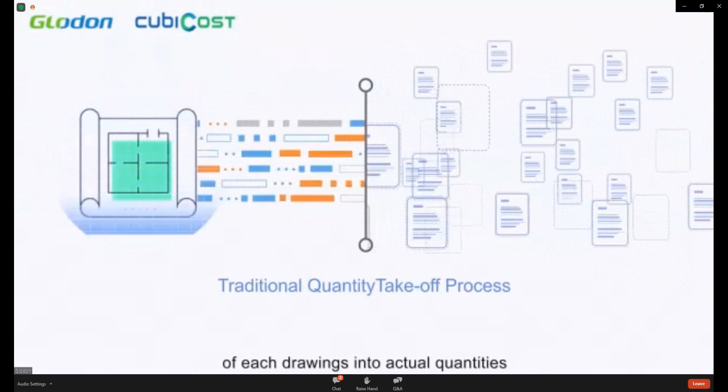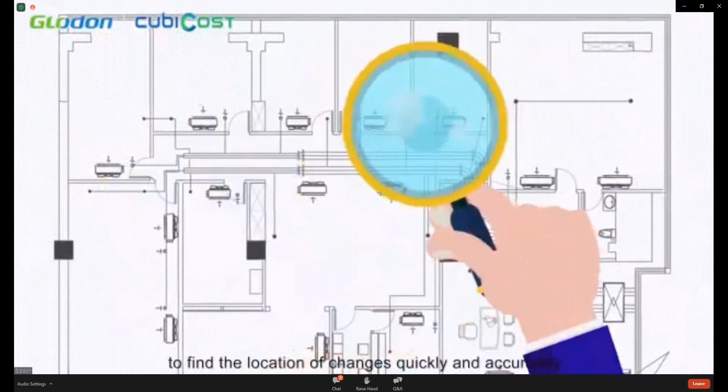The following shows the possible difficulties of the process. MEP consists of various device quantities, so it's easy to lose quantities. Piping is drawn in complex directions, requiring careful segmentation and itemization according to specifications. Drawings often change, and manual comparison cannot find the location of changes quickly and accurately. In cross-checking for errors, it's hard to find the relation between the quantity and the drawings.

Have you also encountered such problems? Let's see how Tmec can help transform your MEP quantity takeoff process.

Cubicost ME quantification tools have been developed for years. We really appreciate all the help and feedback from our fellow clients, because all of you are the reason the software is getting better now.

First of all, do you guys know what Tme is? Tme is an ME quantity takeoff software which helps all MEP professionals in the construction industry, including developers, consultants, and contractors, to calculate quantities rapidly and accurately, and check quantities easily and efficiently. Overall, Tme is able to help enhance your quantity takeoff process.

So now we introduce to you Tmec. Tmec is a new product in the Cubicost product line, a new platform especially for ME quantification, programmed with a new programming language as its base. Thus, it performs much faster compared to the older version of the ME quantification tool.

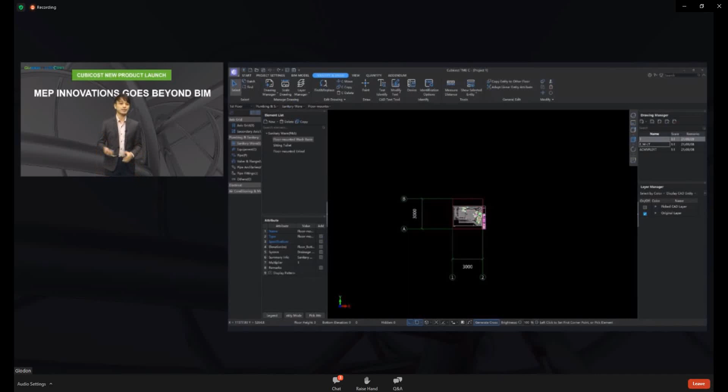Firstly, we have the function area. Then we have the drawing manager, where you import and scale your drawings, and the major elements navigation bar, where you can find all the major trades, for example ACMV, electrical, plumbing, sanitary. Then we have our element list - this is where the database is - and also the model area in the center, where you do your quantity takeoff. Lastly, we have the function toolbar, which is very easy to use and located at the bottom for easy access.

So all of this covers the content and corresponding functions for the entire M&E services quantification. Overall, Tmec is comprehensive and intelligent. The various function categories are clearly distinguished now in different ribbons, and it is easy to learn according to the layout of the calculation process.

To initiate a Tmec project, these are the usual steps we use to get the quantification. Start by managing the drawings, in which we import, scale, and locate the drawings. Then quantification follows. So it is actually pretty simple.

And one of the new enhancements in Tmec this time is regarding drawings. How do we deal with multiple drawings? Can we process them very quickly? For QS, handling multiple drawings is one of the important things to do. So how do we deal with drawings in Tmec now?

In fact, the overall process in the software is basically the same, but has been much improved from the previous version. For managing the drawing, you only need to go through a few basic steps: first, activate the function by importing the drawings. Then locate the drawing - for example, you can pinpoint or position the drawing accordingly. Then you can scale the drawing to the correct size.

Occasionally, if necessary, we can split the drawing if you have multiple levels or stories in the same drawing. Then lastly, you can go through the floor settings to edit the floor information. Why not let us look into detail for the drawing manager in the next slide.

Compared to the old version, Tmec has optimized the usability in the following aspects. The selected drawing can now be previewed directly, but if you're still not sure about the drawings, you can even double-click the picture here to preview the drawing in detail before you import.

In the scenario of multi-page drawings, you can control the range of the imported drawings now. For example, I want certain pages of the entire PDF, maybe page number 1, 3, 5, or 7. I can select what I want to import instead of importing the entire PDF.

So the whole set of drawings are not in the same scale, but maybe some of the scale could be different accordingly, which affects the quantification accuracy. So in this case, QS also requires the ability to process the drawing quickly.

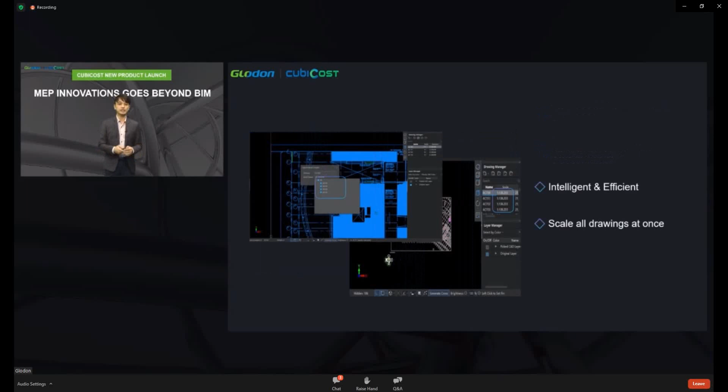In addition, Tmec can now scale all drawings at once, as I mentioned just now, after you import the drawings. This greatly improves the efficiency of the process in managing the drawings in Tmec.

Also, Tmec supports one drawing now across multiple floors for reuse purposes. This enables quick calculation on multiple stories when you have the same drawing for multiple floors.

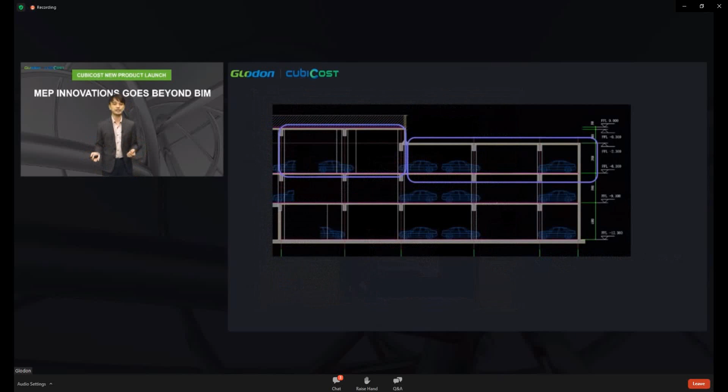To support this function furthermore, Tmec is now able to solve these kinds of conventional scenarios for buildings with different floor heights, especially like residential projects. We have various blocks, right, together, sometimes with a car park.

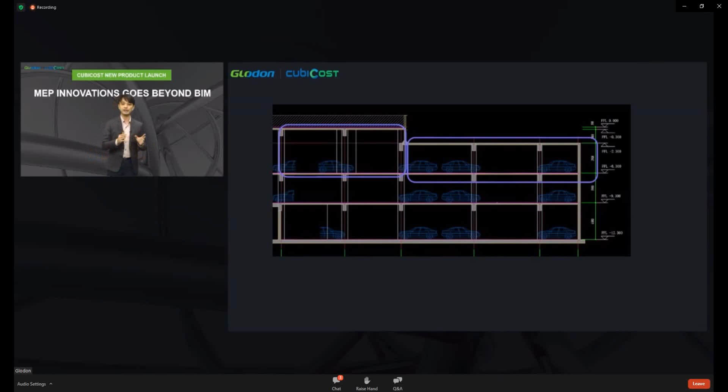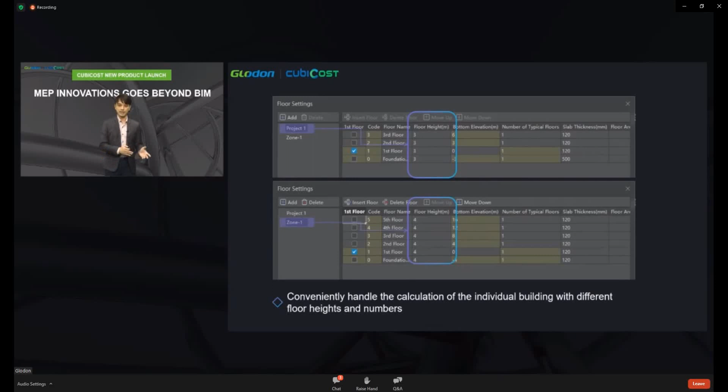In order to quantify this, they need to calculate the quantity separately by blocks. So in Tmec now, it can easily solve such problems by adding multiple zones to the floor settings. With this, floor heights of each block or zone can be set independently.

So right now, we have already seen some of the basic improvements for drawing processing in Tmec, right? But what about changes in drawings? Traditionally, we have to find out the changes on top of the drawings manually, which is highly time-consuming.

So let's take a look at how Tmec can quickly and accurately find out the location of changes this time, compared to the old version, in which it required QS to open a drawing externally to compare the changes, find the location in the drawing, then return to the TME for subsequent calculation or editing.

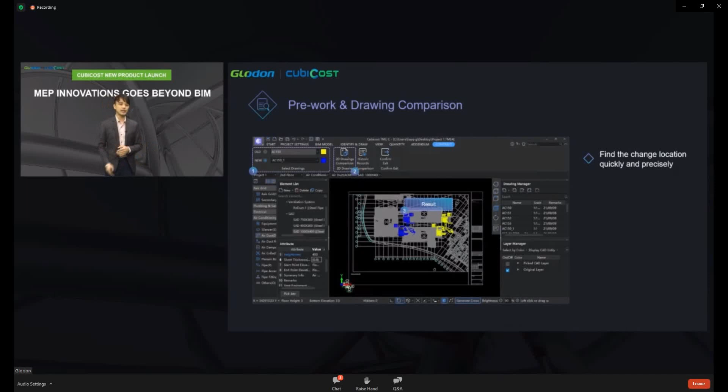In TMEC, it is now included with a new function for drawing comparison. QS can now nominate two drawings to compare. We can see that the location of the changes are marked in different colors. This allows the differences to be located quickly and accurately. When discrepancies are corrected, the comparison remains in the drawing area and the changes can be viewed in real time.

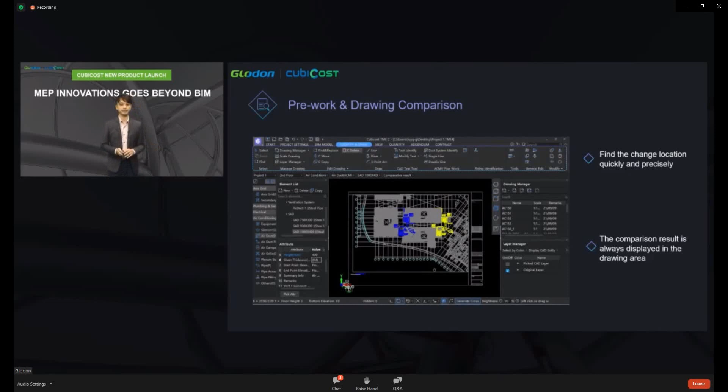So that's pretty much about the drawing enhancements. Next, let's take a look at the core content for M&E major trades. Firstly, let's get to know the improvement in electrical trades.

In the electrical sector, TMEC supports the calculation of the following elements. Firstly, we have the lightings and luminaires, but with the enhancement on lighting strips now, we can calculate in terms of meter length, switch socket outlets, distribution boxes, wire cabling, and also tray trunking, bus bar, and last but not least, we also have lightning protection systems. So in TMEC, each calculation has a function to help us calculate the quantities easily and efficiently. Let's look into more details here.

You may encounter the following problems when measuring the quantities of electrical work. There are many kinds of electrical quantities, often with different labels to differentiate them. In this kind of scenario, QS has to quantify them individually according to their label assignment. It is pretty easy to miscount the quantities when you do it traditionally, because we have to separate them with different highlights or colors, then further transfer them into Excel carefully to compile the data.

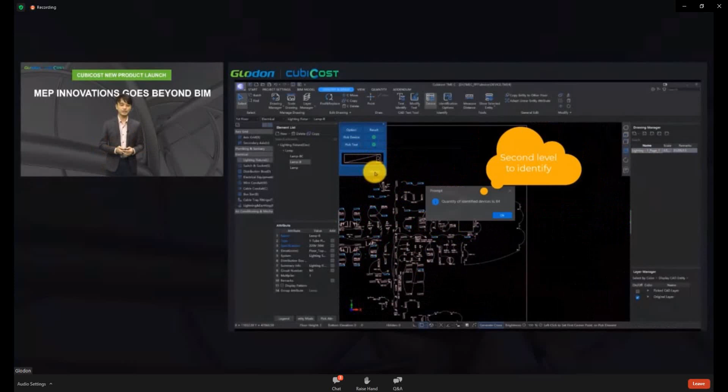In TMEC, there is no need to convert the text first anymore. It only takes 4 steps to identify the devices with labels in the drawings. Then the location of the identified devices can be previewed in advance to further ensure the accuracy of the identification.

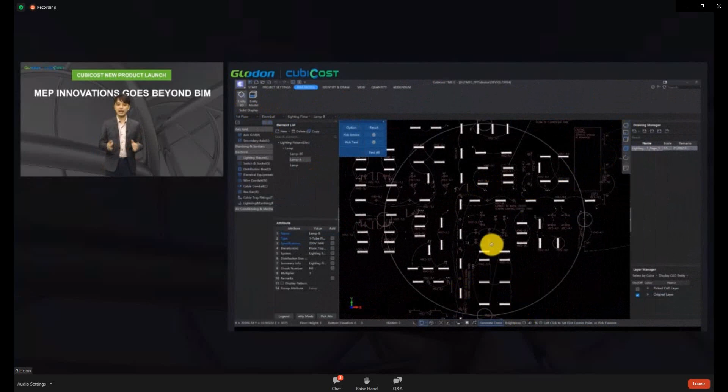This functionality is able to identify hundreds of elements in 3 seconds on average, which is 40% more efficient than the old version. Overall, it is more efficient, simpler, and more accurate.

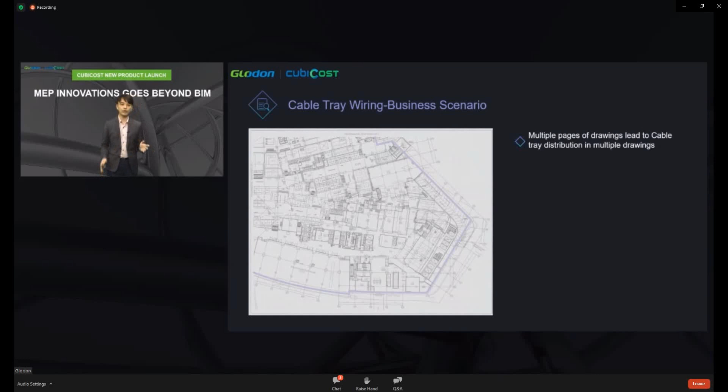You may also encounter the following problems during conventional takeoff in electrical work. The drawings have long circuits for power and lighting systems, especially across floors or even in the same floor, and now they are generally distributed in multiple drawings if the project is big. So it is necessary to find and measure the corresponding length quantities one by one. This process is again highly time-consuming and it has low traceability. Furthermore, the work is not easy to verify.

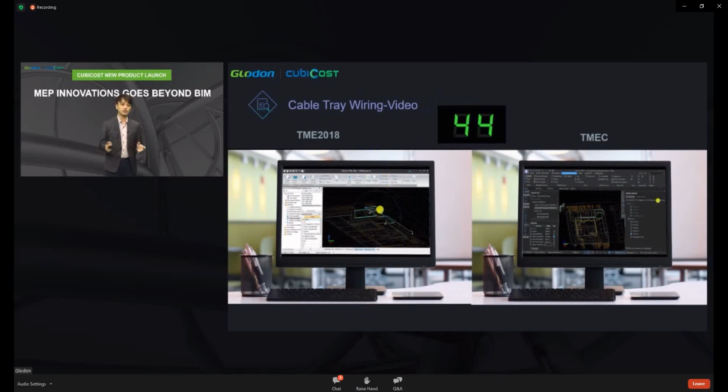In the old version, if you look at the left side, the wiring function had to be operated through many windows. Users found the process very complicated, and it was not easy to learn for newcomers. But do not worry anymore.

Right now, TMEC simplifies the whole process on the basis of ensuring accurate wiring, making it easier to get started for every user. Especially for sub-main cabling works, users only need to select the start point and the end point of the circuit to quickly complete the entire wiring. It can be done in 3D view or in the same interface, which means no more multiple confusing windows to operate.

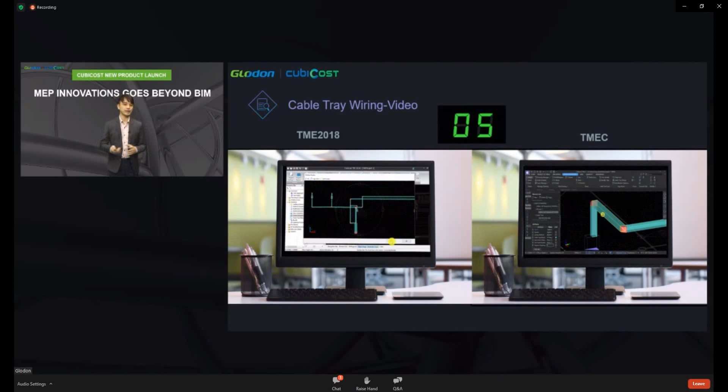After the cabling measurement is completed, you can counter-check the routing by distribution box to clearly locate the quantities and verify how certain wiring is being done in the routing.

So after understanding the electrical trades, let's switch gears and look into ACMV now.

In ACMV, we support the calculation for the following contents. First of all, we have ventilation fans, air ducts, and fittings, coming along together with the silencer, air dampers, grills, diffusers, and even the plenum box.

In TMEC, each calculation content has corresponding functions to help calculate the quantities conveniently and efficiently.

The customary process allows QS to classify and count the quantities according to the connected fan equipment. If we use the software to identify the fan, the software can help us synchronize the fan information connected to the air duct, air dampers, or other equipment with one click, reducing time consumption and greatly improving work efficiency.

Just now, we understood the convenience of identified fans for subsequent processes. So let's have a look at how ventilation fans are calculated in TMEC.

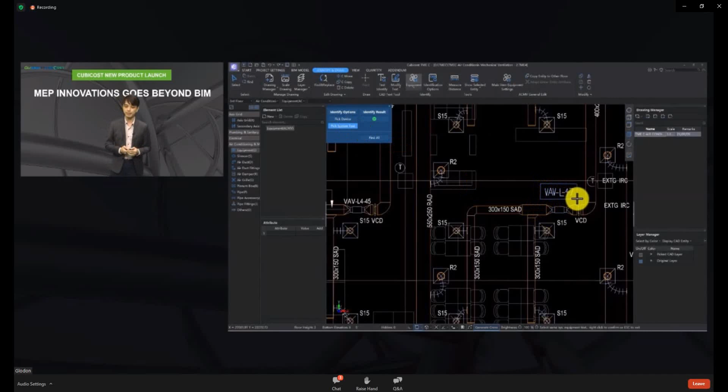Now, in TMEC, you only need 4 steps to identify them. In this example, all of the ventilation fans with their unique individual labeling are identified altogether at one time, and presented automatically according to the fan names after identification is completed.

Traditionally, when you quantify air ducts, you may encounter problems. There are multiple air duct systems in the drawings, and the specification, materials, and thickness of the air ducts of each system are also different. In the conventional method, we classify and count the quantities according to the system and equipment. This process is cumbersome and time-consuming.

Also, there is insulation to be calculated. Insulation includes internal and external insulation. The insulation materials, thickness, and calculation methods are again very different from each other, which makes it not very direct for us to calculate the insulation quantities manually.

Thirdly, there are many types of air duct fittings, such as T-type, reducer, elbow, and etc. Some connector types need to be calculated, some do not, which further makes the calculation more troublesome. In addition, due to the irregular shapes of reducers and elbows, it is also difficult to calculate the quantities of the respective expanded area.

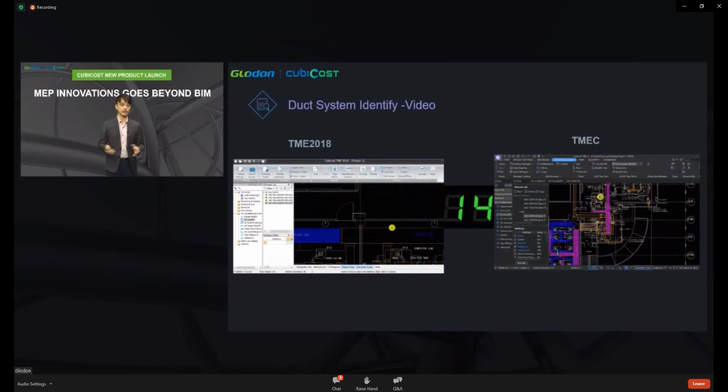Compared to the old version on the left, TMEC improves the calculation efficiency by about 45% when identifying a whole drawing for ACMV trades.

In the old software, it was difficult to distinguish insulated air ducts from common air ducts. TMEC has made a special display for internal and external insulation, as well as fire-rated air ducts, as you can see here, which can clearly distinguish the insulation types of the air ducts and revise the original calculation rules for insulation, so that the calculation quantity is now more accurate than before.

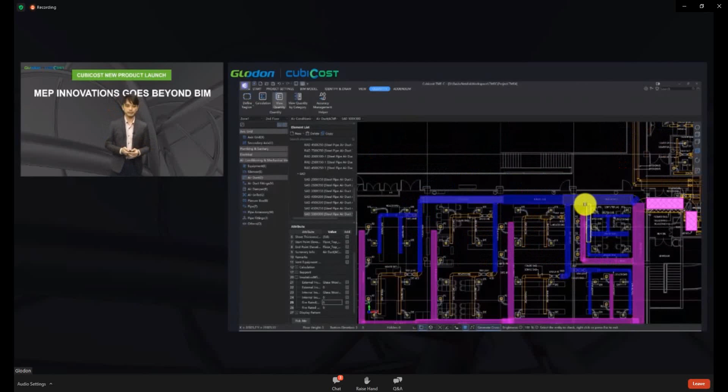For air duct fittings, there is a specific function for this. Air duct fittings can be generated all in one go, just by using the air duct fittings identification function, as you can see here. Multiple air duct fittings are generated at the same time.

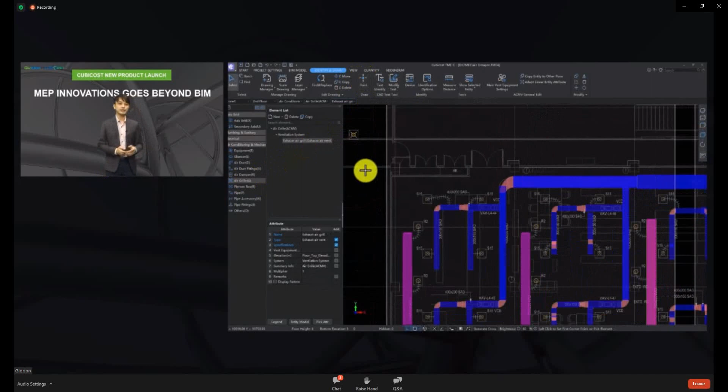What about some air duct ancillaries or air duct parts? Compared to the old version, TMEC can draw air grills and diffusers independently now.

Also for air dampers, it matches the air duct specification when the air damper is identified, as you can see here. So the air dampers inherited the duct information, for example, sizes and also the system.

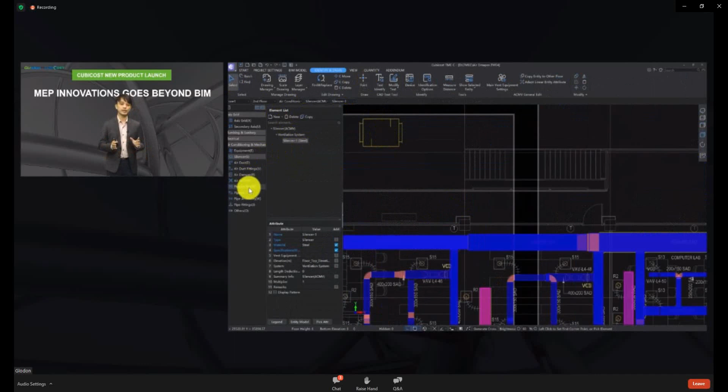In addition, TMEC also supports the quantification of doing silencers and plenum box also.

After quantifying the air ducts, equipment and the rest, let's take a look in the video to see how quantity can be extracted in TMEC.

In TMEC, users can trigger the functions main vent equipment settings under ACMV trade. TMEC will synchronize the fan information to its connected air duct, air dampers, plenum box, and etc.

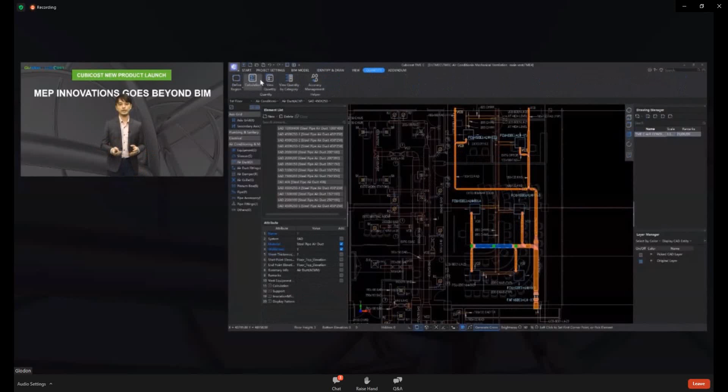If the equipment has multiple ventilation fans, the software will give a prompt and user can select output according to their preference. After the quantities are calculated, we can view the quantities of the air ducts that is connected to each different equipment.

If the user tries to double click the quantities here, they are able to perform a check of the corresponding quantity like this.

Aside from ductings in ACMV, it is also often that QS needs to quantify AC pipings.

In TMEC, it is now supporting the following content, including AC pipes, refrigerant pipes, together with the valves and fittings.

In particular, compared with the old version, TMEC is now able to quantify refrigerant pipes in a more efficient and accurate way, which last time we don't have.

So that's all for ACMV. Now is the third trade in TMEC, plumbing sanitary.

In PNS, TMEC supports the quantification of sanitary wares, water pumps, tanks, piping, together also with the valves and fittings. Let's have a closer look.

Have you ever encountered the following problems? In calculating the quantities of the water pipes in plumbing sanitary, when the elevation of the two connected water pipes is different, the quantities of short riser connecting each other need to be calculated manually.

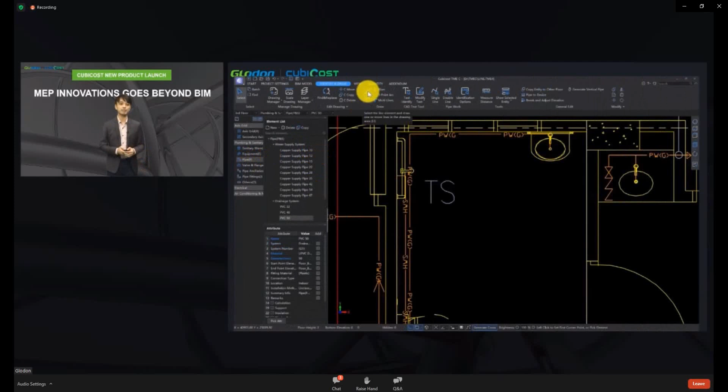elements, common water pipes, material, and pipe diameters are built in beforehand in TME. After water pipe elements have been selected, you can set the elevation and draw a straight line straightforward.

In the process of drawing the water pipes, the elevation can be adjusted flexibly and quickly.

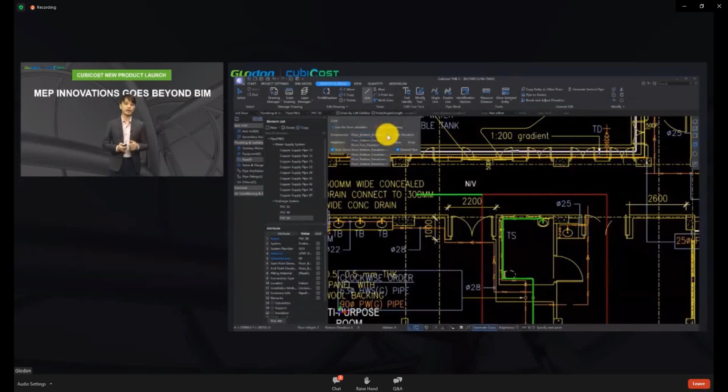It can be seen that once all the piping has been done in the 3D mode, you can view that the short riser in the connection will be generated automatically like this, according to the change of water pipe elevation.

The user can also now use the view quantity function to check the quantity for each section of the water pipe in real time.

So in another scenario, for example, the cross-floor piping like this, when you calculate the vertical quantities under the plumbing sanitary trade, you may encounter the following problems.

It is very easy to make mistakes when converting the elevation of cross-floor risers.

TME only needs one function now, which we call the riser function, to perfectly resolve all problems.

So for example, QS just needs to select the water pipe element first, then set the starting and ending floors of the pipes to draw.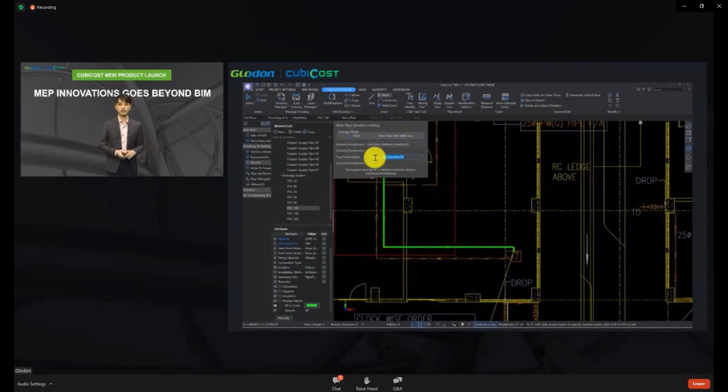Compared to the older version, TME can also handle the vertical riser with reducing diameters. The spatial direction of each section of the water pipe can be clearly viewed under 3D so that the quantities are very easy to verify by the QS.

Okay, so next, let's look at the relevant quantification output in TME.

In quantification, according to the requirement in BQ, the actual output dimension varies, such as by building, by floor, or sometimes by room, or even sometimes a combination by building first and then by floor.

There are many ways quantity can be tabulated and categorized by the QS.

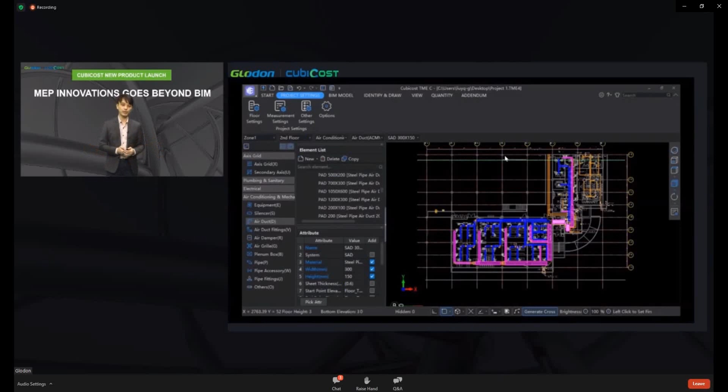So let's watch a video on how to output quantities in TME accurately and flexibly.

First thing, we can support multiple zones quantity outputs.

For example, after summarizing, the quantity can be classified according to the building zones now. Click the specific cell to tabulate the quantity of the specific zones.

And also, you can output the quantities by floors like this. You can set the floor as the first level of classification in the classification query.

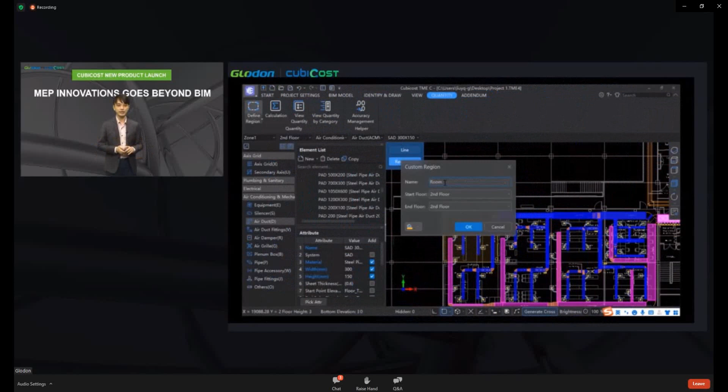If the quantities need to be measured according to the area, first the user can define the area needed using a straight line or even a rectangle. So we have about 2 methods to draw now, which is very fast and efficient. In the process of drawing rectangular area, if the area is large, multiple areas can be drawn continuously and the software will merge the areas automatically like this.

And if the area boundary changes, you can re-edit the area boundary, which supports free drag and stretch. So once you have finished completing the region, set the region as a first level after the summarize classification condition. Finally, the quantification will be classified as per region.

Lastly, QS can also click any cell to find the quantity in a specific location in the drawing area.

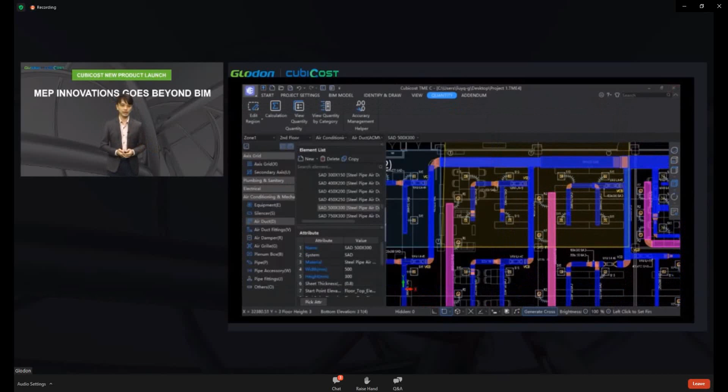With this, finally, let's look into the TME future plans. Firstly, we are going to have a professional expansion in the future by adding 2 other major trades in TME. First of all, we have fire protection to look forward to, together with the ELV system, extra low voltage.

Also, we are planning to include a new function in the incoming software updates for scan drawing identification. So hopefully all the QS can bid farewell to manual quantification for scanning drawings, especially for the major trades.

So with this, I hope all of you have a better insight now for the Cubicost TME solution, and how the solution is able to address MEP QTO needs, advance the QTO processes, and how it can benefit MEP organizations in the long run. So just to remind everyone, if you have any questions in mind, please feel free to drop your questions in the Q&A chat box.

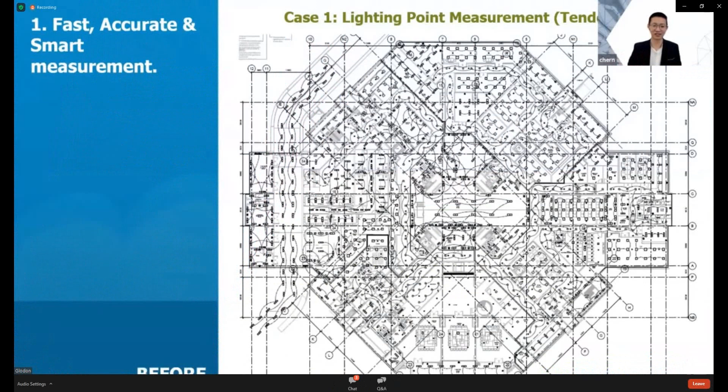So this slide is my secret recipe on how I recorded down my quantity before our company adopted this digital solution. The first thing you can do is crop this legend table from the legend list drawing, paste it into Microsoft Word or other Microsoft software, then print it out and draw a box on it to show the different floor levels. So like you can see here, what I do is go from basement all the way to level 9 with some mezzanine floors, and you just record the quantity here.

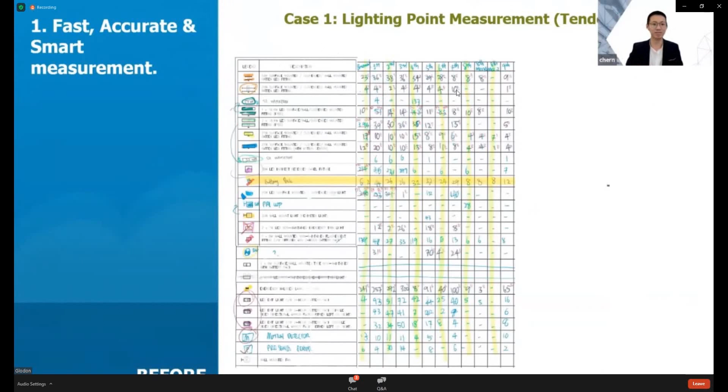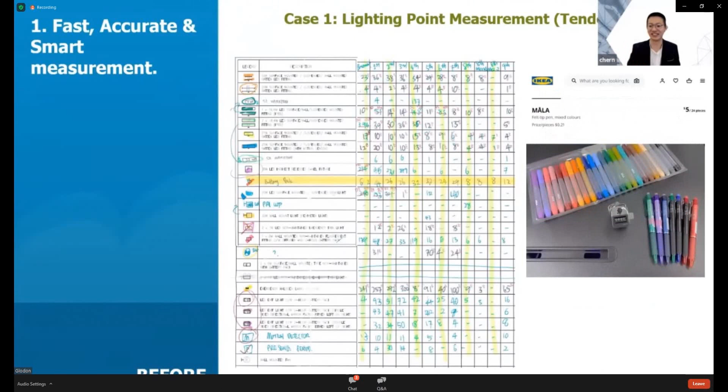Next, this - a very important item - called MÅLA 24 colors marker pens from IKEA, which just costs about $5, and the erasable pen from Don Key. In the next slide, I will show you why you need to do so.

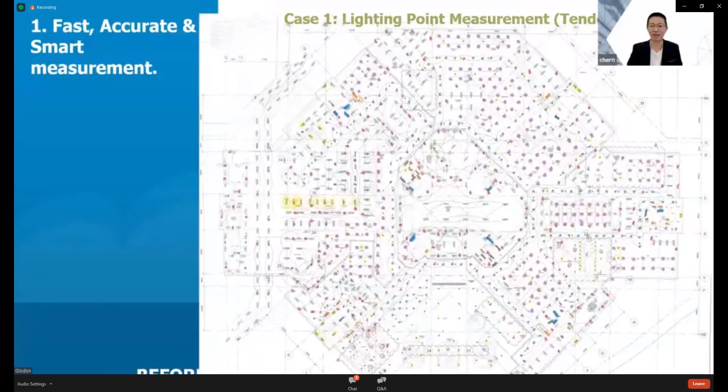Because every time you tap the counter for measurement, simultaneously you have to mark with the color pen on the drawings and record down on the papers. Sometimes you may realize that some legends are missed out, and then the best thing to do is use this erasable pen. So after you record and realize the mistake, you can just erase it and rewrite the quantity on the hard copy table.

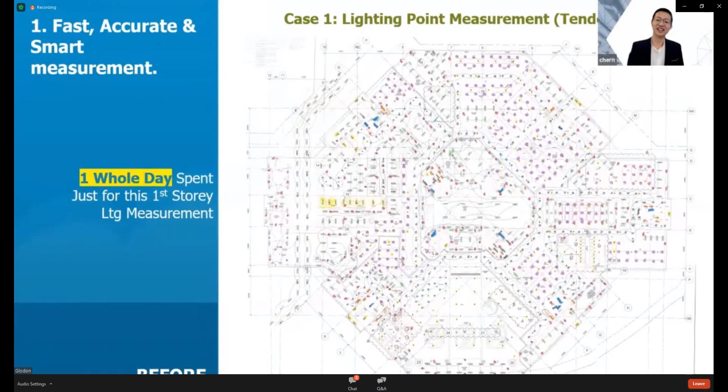Kidding or not, for only this one storey it actually took me about a whole day to complete. Because our daily work involves interruptions, we need to answer some interrupted calls, reply to urgent emails, or join discussion meetings, and if any of that happens, the whole day is gone and only this one piece of drawing is done for the measurement.

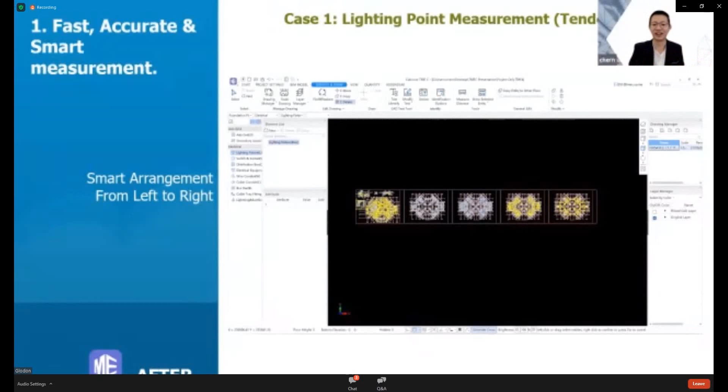If you also feel me on this problem, here's a solution from my company, and we actually give this software a try. It's super smart. You can insert as many drawings as you want into the same template, just like this, and it will be arranged from left to right, as you can see in this picture.

This software also has a very smart layout identification function. It's automatically identified, and it's best for visualization for quantity takeoff purposes. It's able to differentiate the grid lines, as you can see here shown in pink color lines, the architecture lines in gray, and some M&E lines in yellow colors.

We're able to hide or show the lines that we want to see or visualize, like this. So what I do is I just hide away those archi lines and the grid lines, and show only the legend lines, so it's in the yellow color.

Next, here's a quick video showing you how I let the software run for the identification work. Let me play the video.

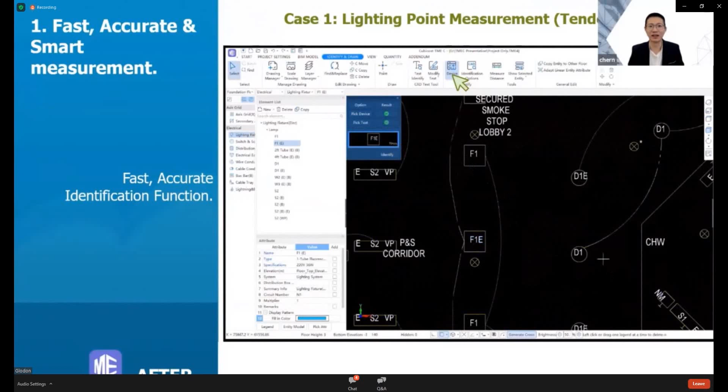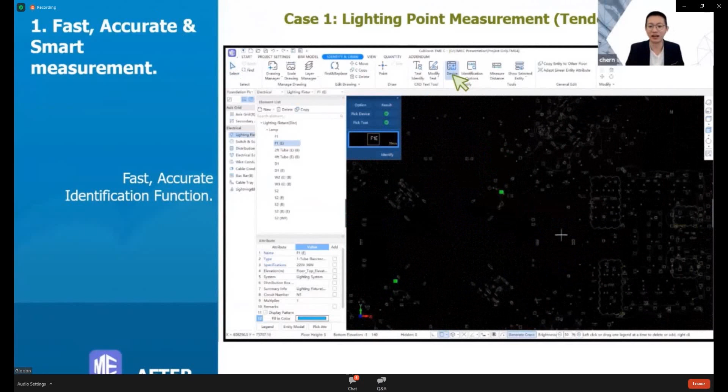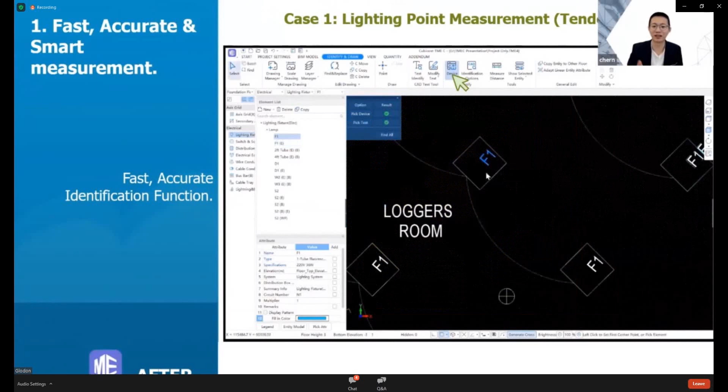The first thing is you need to zoom into the drawings and follow the instructions. First, select the legend item, pick the device - like I would do, the F1E lighting - then click the find button. If you can see here, it's showing 17 numbers of this kind of lighting, an E-source downlight F1. You can also identify other types of legend lights, like I do now - it's also a downlight, but it's a normal source F1 downlight. You just pick the device, pick the text, and click find. It's showing 442 numbers of this kind of lighting among all the levels.

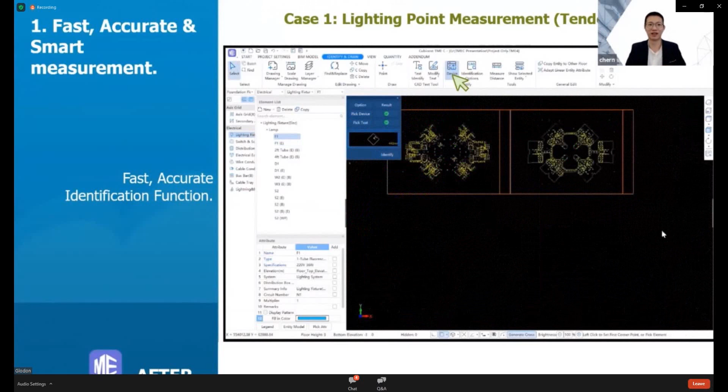Just one click and you can measure for all stories. You can also set it to the color which you prefer - like I do, I pick a blue color for this F1 downlight.

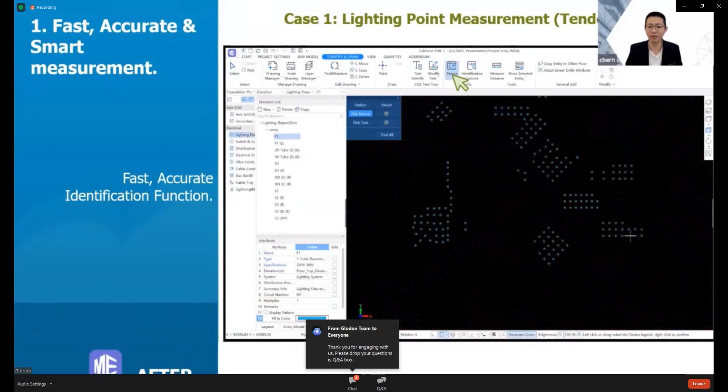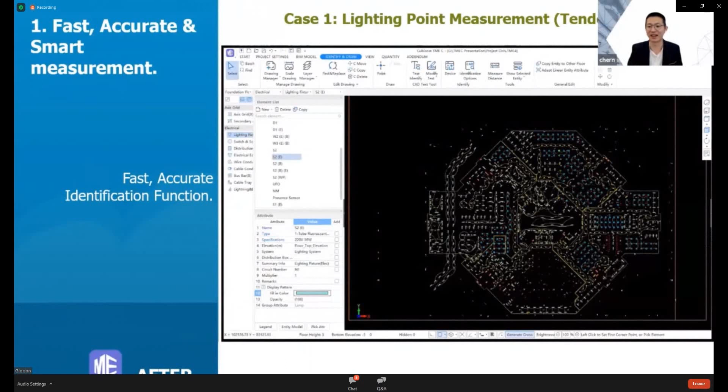This is after I finish my legend identification work. As you can see here, all the identified legends are very easy to visualize, and you can hide or show the archi lines back anytime you like. Now it's showing all the identified legends, and you just press one key to bring back all the archi lines if you want, just like this.

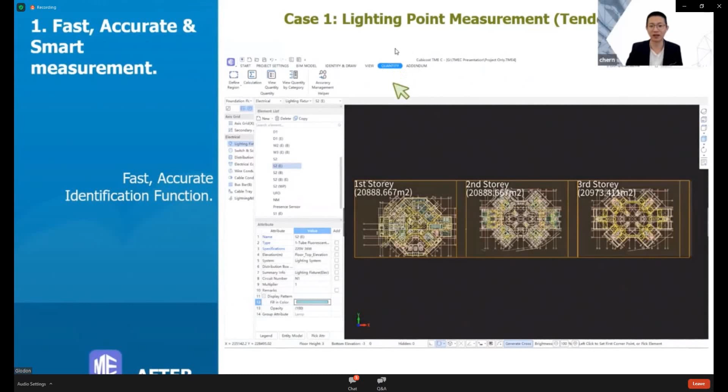The brilliant part is the quantity is auto-generated. What you need to do is just tell the software which drawing represents which level or zone. Just like what I did here - I separate the drawings, first drawing represents first story, second story, and third story. You just click on the quantity tab and it will show all the quantity by each category level. In detail, you can see the first story, second story, third story categorized with different types of lighting, and the quantity shown in this column. You can also export it to an Excel file, very easy for your measurement or inquiry, and just send it to your suppliers to get a good price in advance.

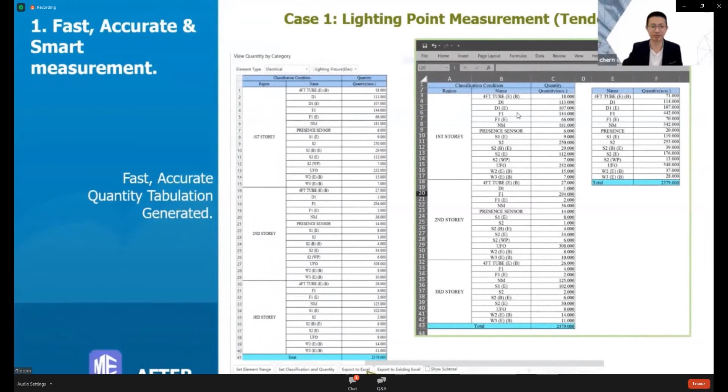Next, in some tender project cases, you may find that some quantities are required to be priced based on different zones. Like for this project example, it's needed to separate out the price to fill in based on north, south, east, west zones, and separate out the common area zones.

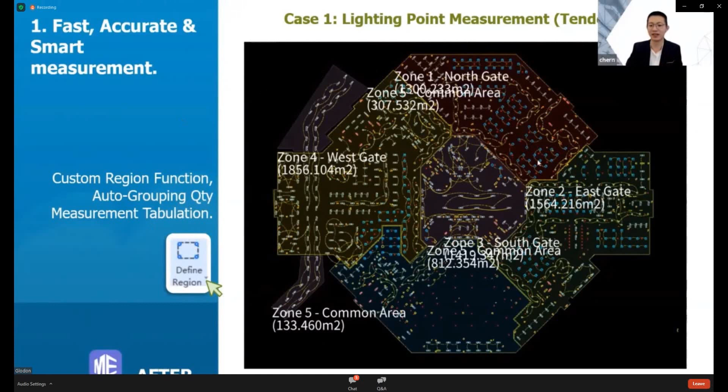This software can also do so by using the define region function - a custom region. You just pick a line here, group it as a zone, and with just one click on the quantity it's shown, auto plus-minus, auto separated depending on what kind of setting you want. Like I do for the first story, I separated it into 5 zones, and lighting is shown here based on each type, with the quantity shown here.

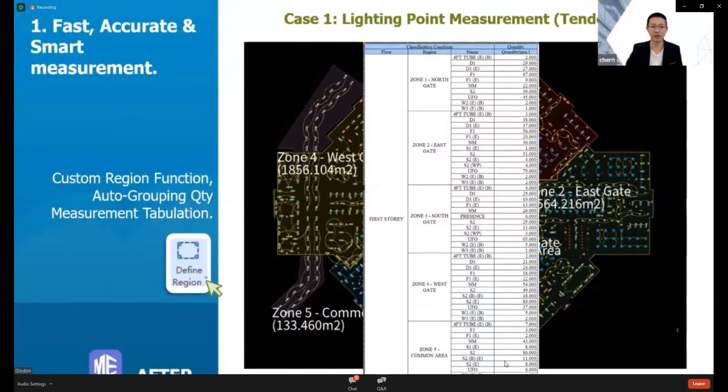So that's all for the first topic. Next, we move to the next topic, which is cost saving measurement.

Here's another case study from our past experience without the digital solution. It's about cable support measurement. Some projects come in with 250 to 300 hard copy drawings, and imagine if you want to print it out, how many trees get cut. My brain is unable to process all those puzzle drawings without joining them together.

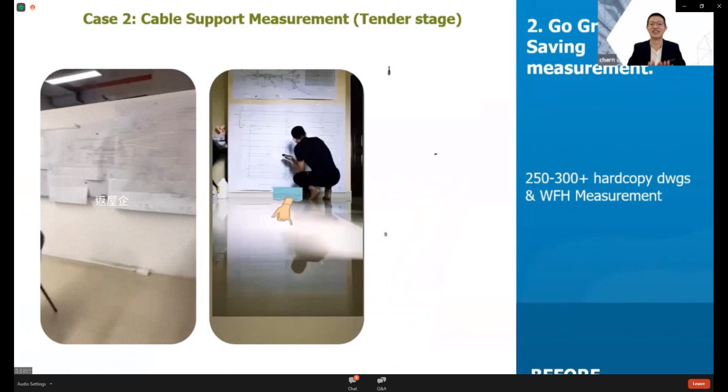So this is usually what I do. I just tape it together and press it on the wall. Here's another starter pack from me, a recipe for you to take away, especially for those working from home. If you don't have enough space at your rental unit or a big table at your place, you can tape it on the wall like what I did and do a measurement on it.

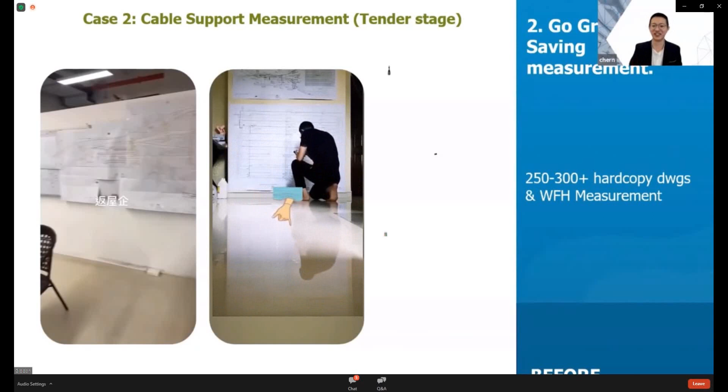Next, these are the tools you may need to invest in if you're not going to use any digital solution software. The first is the Scale Master ruler, which you can get from Amazon. You'll also need a Sellotape for taping and jointing the drawings together, and an erasable marker pen, which you can get from Popular.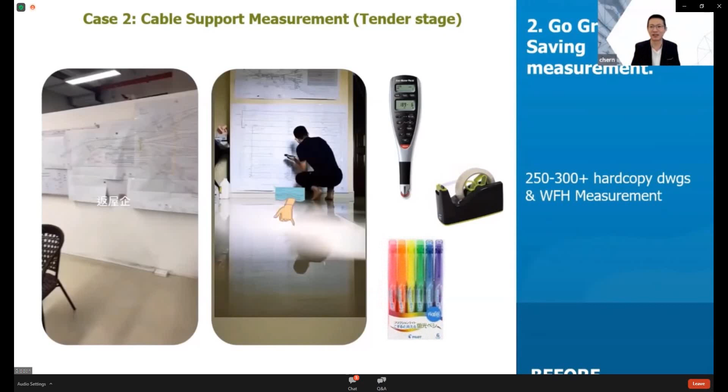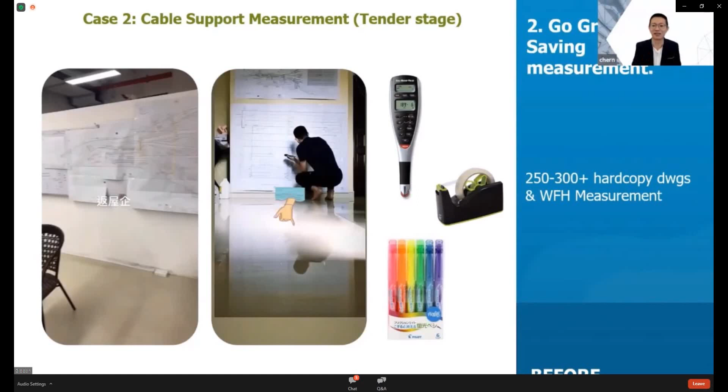What you need to do is tape the drawings together, then highlight all the cable supports based on each type - for example, the trunking, the cable tray, the conduits, and the different galvanization types and sizes of trunking. You can use the highlighter and the Scale Master to set the scale, roll it out, and record down the quantity.

Here's how we counter this traditional method for cable support measurement - using TMEC. With TMEC, you can insert all the puzzle drawings into one same template, just like this. It's very flexible to edit - you can move or join it like you're using AutoCAD.

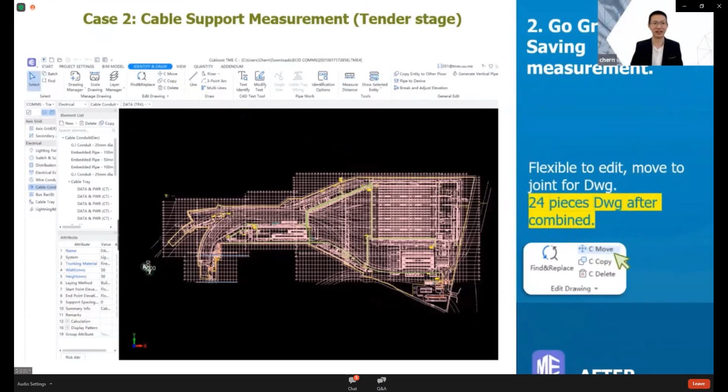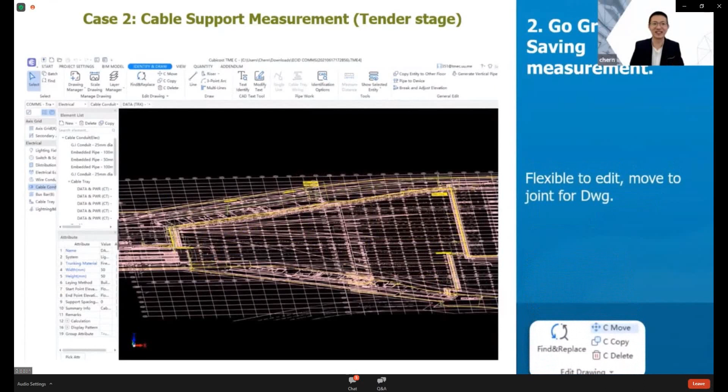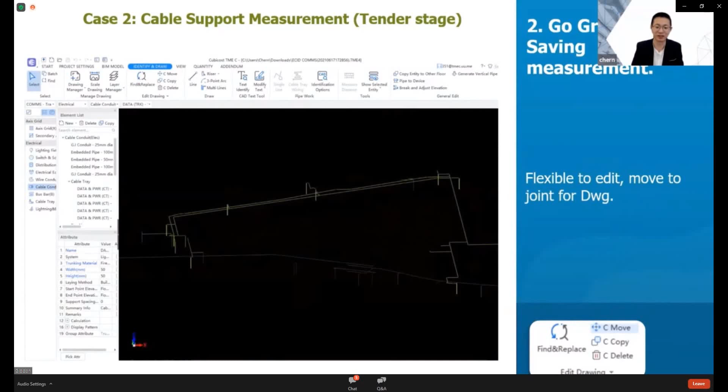For this piece of drawing, it's actually 24 pieces in total. You can view it from different angles, even in 3D mode, just like this. The measurement can also be done in this software - just one click on the quantity tab and export it to Excel to get our supply codes. This picture shows only the cable support in 3D mode, where you can see the horizontal and vertical trunking, and here the orange color represents conduit class 4.

So that's how I do my cable support using TMEC. To conclude this topic, it's actually very paperless, and it's very good for those of us working from home - we no longer need to carry heavy hard copies back from the office. It's also spaceless - you save a lot of space and have a neat, tidy office. You don't need to spend money on office furniture just for housekeeping hard copy drawings. Next is sustainable - the working drawing data can be saved as a soft copy and won't go missing anymore.

Last point is accessible - you can refer to the drawing anytime, anywhere, just link to the internet or the cloud database and show it wherever you want. For example, maybe you need to show the quantities during tender interview sessions with your clients - just do so, no need to bring hard copies, and it will impress your clients.

Finally, this diagram shows the BIM model development plan for the pre and post contract, pre and post construction stages. For our MEP QS, you may refer to the yellow highlighted box, which shows the 5D quantity takeoff and the 5D progress payments. This is the reason why we need to adopt this BIM trend.

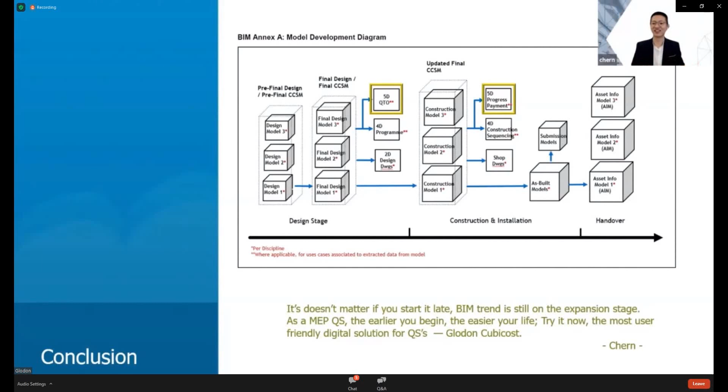Thank you, Mr. Chern, for your impressive and in-depth sharing on how Cubicost TME solution digitalizes the QTO process, leveraging the advanced solution to overcome challenges faced during the traditional method. I believe our audience feel impressed by the transformation journey as well.

Next, we have Ms. Gita to share her success story. She is a QS from GW Tech Engineering, an L5 ACMV contractor that has been in the industry for more than 15 years. Now let me invite Ms. Gita to share with us her success story.

Hi everybody, my name is Gita. I'm working as a quantity surveyor in GW Tech Engineering since 2020. My roles and responsibilities as a quantity surveyor are tender documentation, bill of quantities, schedule of technical data, schedule of technical rates, and quantity takeoff.

There are plenty of challenges I have encountered during the traditional quantity takeoff method. I have to use a scale ruler to do measurement, key in formulas and do manual calculation in Excel, and import data from drawings to Excel manually.

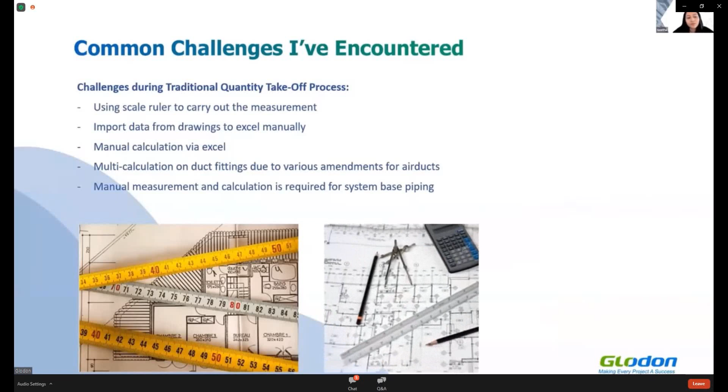Hence, there are a lot of human errors that occur during the quantity takeoff process, and it is really time consuming, therefore inefficient for all of us.

There were times I was unable to complete the projects on time, as it was a very tight timeline given for my projects, and I was really struggling with big scale projects. Back then, using the traditional quantity takeoff method, it was complicated and many revisions were needed as there were many amendments in the addendum drawings. So it made my work quite stressful.

As digitalization disrupts society ever more profoundly, many construction firms had started to adopt digital solutions to ease the work and process. A question popped into my mind: why don't quantity surveyors have a powerful digital tool to help us cope with our heavy daily work and the common challenges we face every day?

Then I was introduced to Cubicost TME solution back in May 2021, and I have been relying on it to complete my daily work ever since. To date, I have completed 4 projects leveraging Cubicost software within the past 4 months.

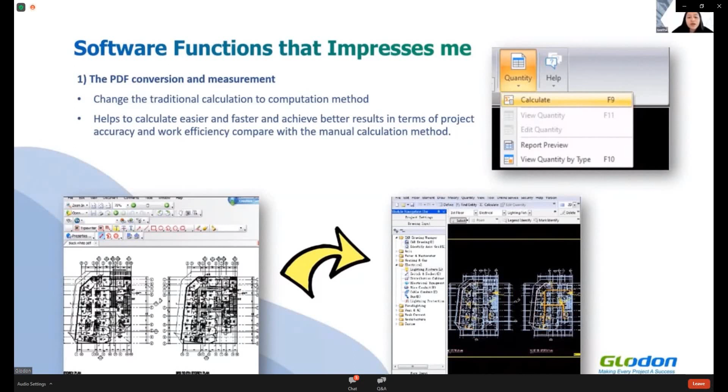With Cubicost TME solution, there are a handful of functions that really impress me. The PDF conversion and measurement function transforms traditional calculation into a computation method. It helps to calculate easier, faster, and achieve better results in terms of project accuracy and work efficiency compared with the manual calculation method.

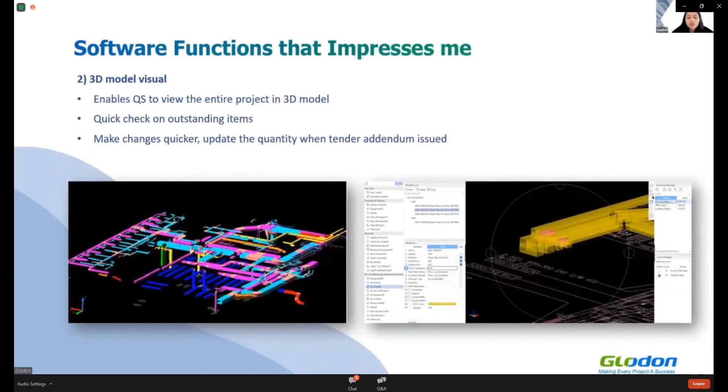Another function is 3D model visual. It enables QS to view the entire project in 3D and do quick checks on outstanding items. Then I can make changes and update the quantity when a tender addendum is issued.

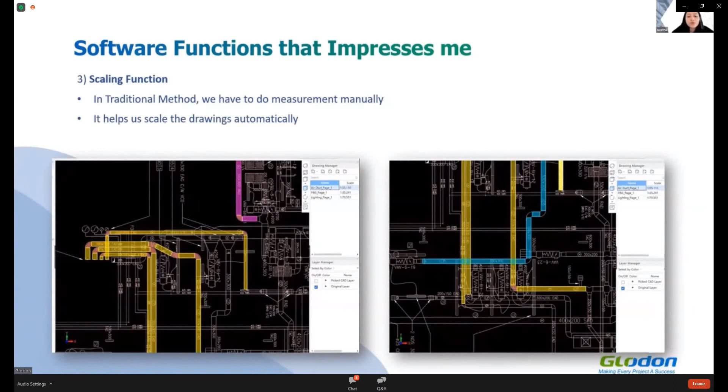And the scaling function is also very useful. In traditional method, we have to do measurement manually, but this smart scaling function helps us scale drawings automatically. So why do I trust Glodon?

It's because Glodon team is always there to support me whenever I have project-related questions. Besides providing in-depth training, Glodon team will also arrange customized project guidance. They will constantly provide feedback on my work and give suggestions for me to improve.

Most importantly, there are regular software updates so that we are always up to date with the latest developed functions and better interface. It makes me feel secure, as Glodon team is always there to back us up.

Here's what I have learned from this digitalization journey with Glodon, and would like to share with all of you. The BIM revolution has brought massive leaps forward in smart build. Working as an MEP quantity surveyor, we would very much want to engage, embark, and embrace the BIM journey.

To those who have not yet embarked on Cubicost TME solution, it's not too late nor too difficult to begin your BIM journey. Do give it a try to become an MEP BIM QS just like me, as there are many benefits to your organization and yourself. Thank you.